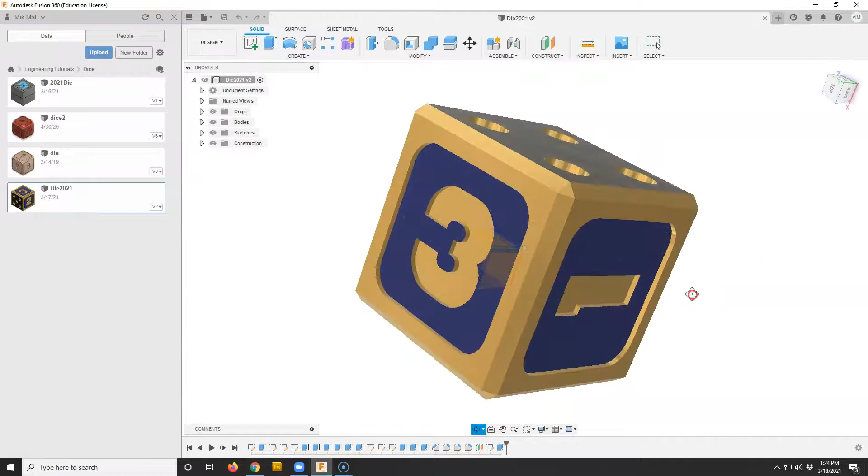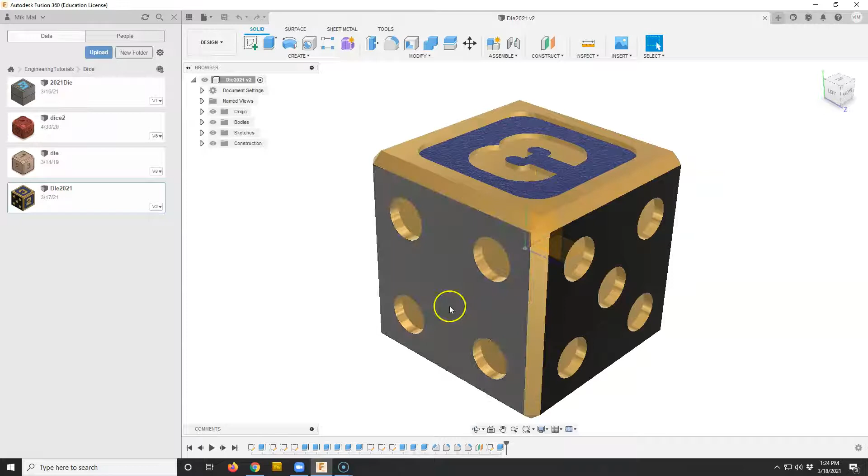If we look at this, the die we're going to make has 1, 2, and 3 in number form on 3 sides, and it has 4, 5, and 6 in dot or pip form on the other sides. It then has our edges, which I chamfer, or we can round them off to make it nice and clean. I threw some colors on it, made it gold with some extra accents on different sides, and then the letters and the pips are inset into the sides. So that's what we want to try to make.

So we're going to make a plan of attack. If we think about what's the main shape this die is made out of, it's a cube. So we want to start by making a cube that represents our die by making a sketch and then extruding it. Then we're going to place the numbers on the sides.

Place the numbers 1, 2, and 3, and then cut them into the die and maybe cut a border on those sides. We're going to place the pips using 3 different techniques on the other sides. We're going to round off our corners, or we can chamfer them. Then, at that point, we'll have a die that's usable.

Then we're going to go and actually make ours a loaded die. We're going to cut out some interior space so that our die is not perfectly balanced, that it might tend to roll a certain way. And then at the end, we can change the appearance and make it a nice, pretty color.

So I always like doing this first, whether it's on paper or in my head, kind of making a plan of attack of how I can take this 3-dimensional shape and create it in Fusion 360. So here's our plan. Let's go through and do that.

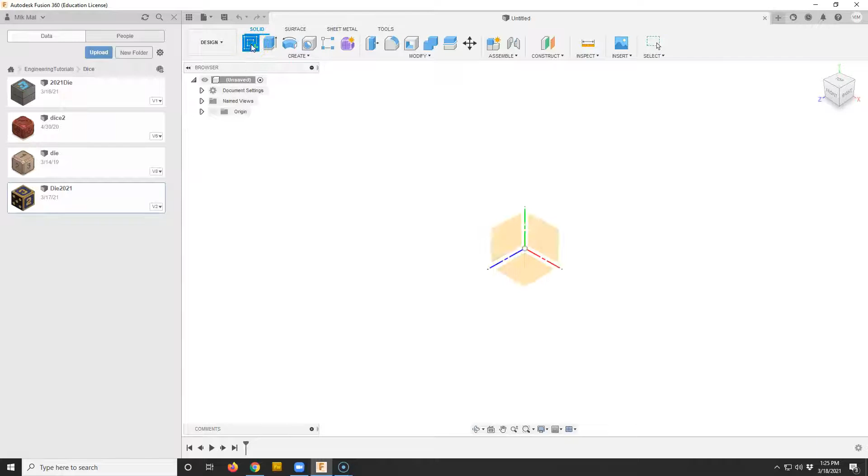Let's go back to a new one, close this off, back to an untitled one. Again, I'm going to first start by drawing my base sketch. Hit the sketch button. Again, we could pick one of our 3 main X, Y, Z planes. I'm going to pick the bottom plane here. And I'm going to use the little world view up here and click on top and rotate it so I'm looking straight down from the top.

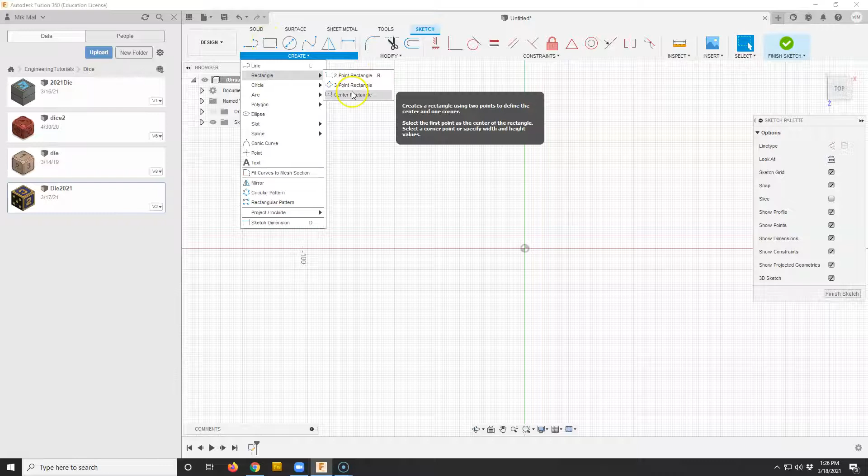Now to draw this, I'm going to first draw a square on the bottom. So I'm going to go to create. I could use this rectangle, but I want mine to be centered, so I'm going to use the center rectangle instead. Click in, and as you notice, my coordinate system showed up when I start drawing. Click in the dead center, it should snap to it when I get close. And then just drag it out.

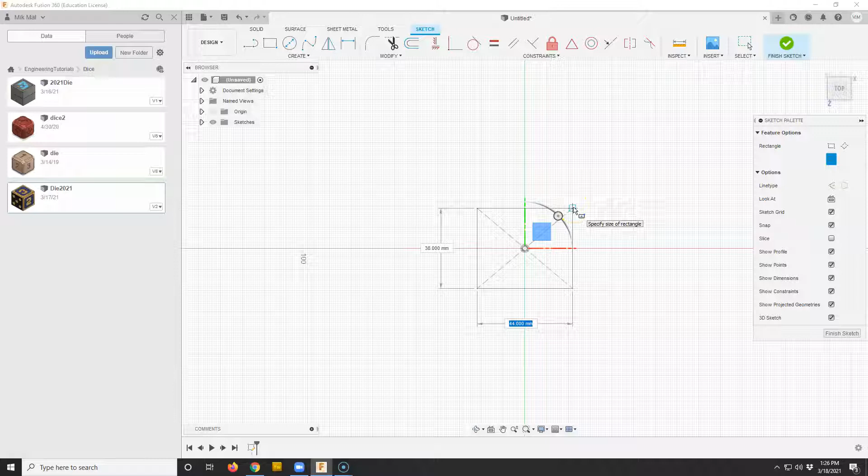Now I could just drag it and click somewhere and go back and change the dimensions, but what's nice about Fusion 360 is as you're drawing stuff, the dimensions highlighted on the bottom, and I can actually type in numbers as I'm drawing and it'll automatically shift the dimensions to be that. So I want to make my cube a 20 by 20 cube. I'm going to go 20, hit tab, that'll drop me to the other dimension, 20, and now I have a 20 by 20 square. Hit enter, finishes it off, zoom in a little bit.

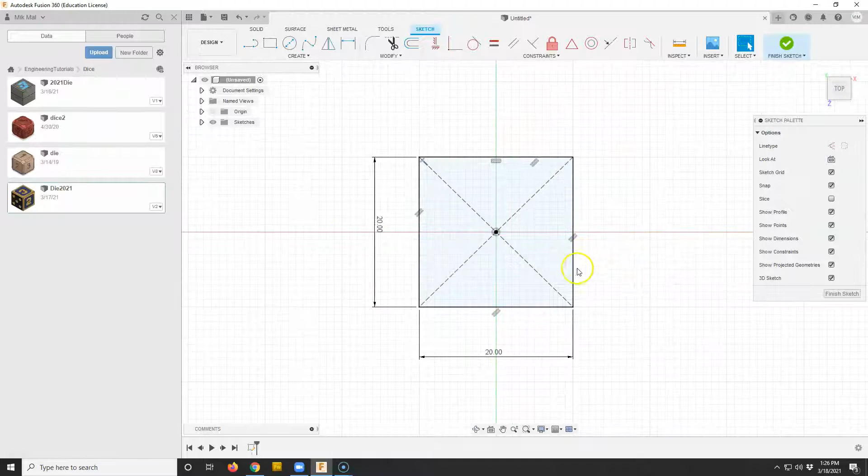Move around the dimensions if you need to, and for now that's fine for my initial sketch, just a square. Now I'm going to go back out to my world view here and click home so I can get it in that angle view. And now I want to create the 3-dimensional part of it.

So I'm going to drag this. We talked about a couple ways of making things into 3D, using extrusions and making revolutions. I'm going to use an extrusion. So I'm going to go up here and hit the extrude button.

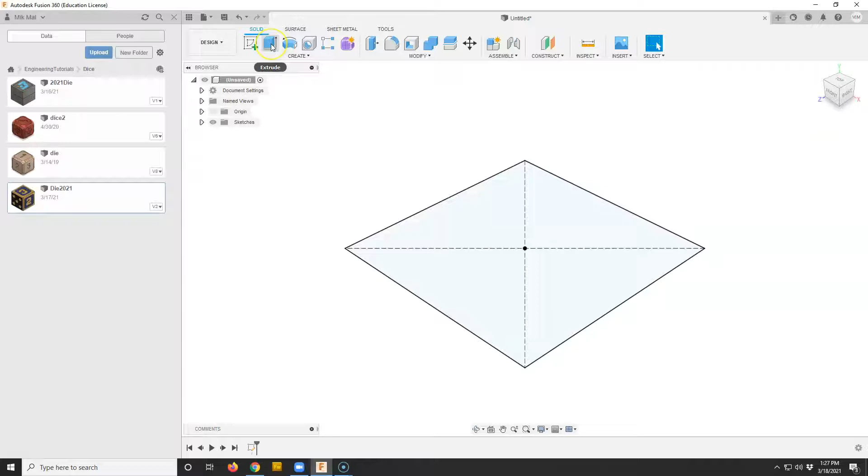And I only have one thing drawn, so it actually automatically picks it for me. If it wasn't, I'd pick what I want to extrude. And now I can extrude a bunch of different ways. So I can just grab this arrow and just drag it. And if I'm playing around and being artsy and visually changing things, I can just grab this and drag it and see what looks good.

As I'm dragging it, again, the dimension lights up, so I could type in 20 to make it a 20 unit size. Again, we're actually working in millimeters here. So that's kind of what I want to do first: I want this to be a 20 by 20 by 20 cube, so I would put in 20. Now, this seems to be fine.

The only issue is if I rotate this, my drawing plane's in the bottom, and I'm going up in one direction. I don't know where the middle of this is. It'd be nice if my drawing plane was in the middle of this cube, because then I'd have a surface dead center in the middle that I'd be able to use if I want to use it for something.

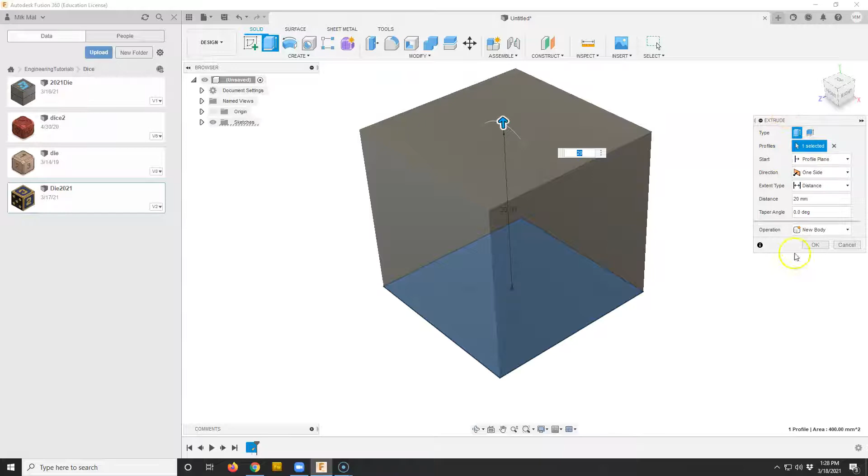So if you look at the extrude dialog box, there are a couple other options. Where it says direction, it says one side. I could select 2 sides, and that would give me 2 arrows where I could drag one way and one the other way. If I do symmetric, when I drag one, it automatically does the other one.

So I could go and drag this along, and for example, I could think, okay, I want to totally be 20. Well, if I go 10 on one side and 10 on the other side, that gives me 20. So I could design it that way. There's also another option under where it says measurement. Right now it's set to half length, so I would be typing in how far I want to extrude it in one of the directions.

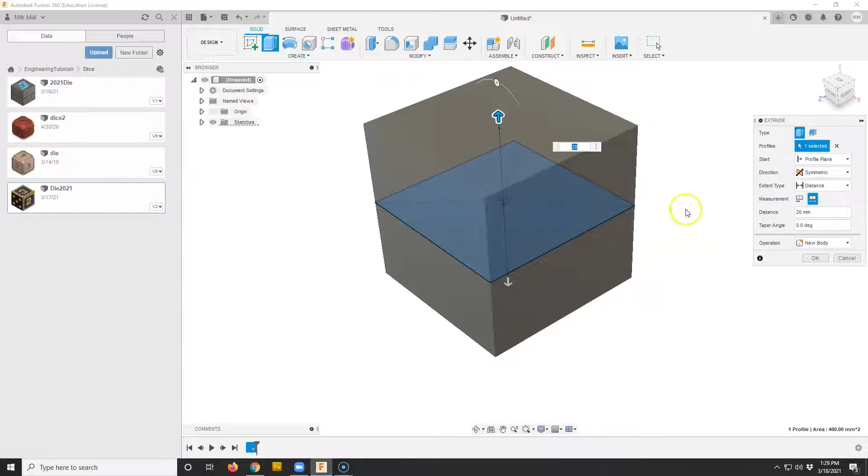But if I didn't want to do that math in my head, I could click this and click whole length. And then whatever number I type in, it's going to be the full length, and the computer does the subtraction and says, okay, this total length here is going to be 20, where it would be 10 on one side, 10 on the other side. So I'm going to use the symmetric one because it makes my life a little bit easier. And when I'm done, I just hit OK, and now I have a cube.

I'm actually going to change the display settings for a second, just so I can see the edges, so we can see a little bit better. So now I have a cube, so I'm on my way to making my shape. So that was my first step. Next step, it says, place the numbers on 3 of the sides. So this is pretty simple in Fusion. I'm just going to go to make a new sketch.

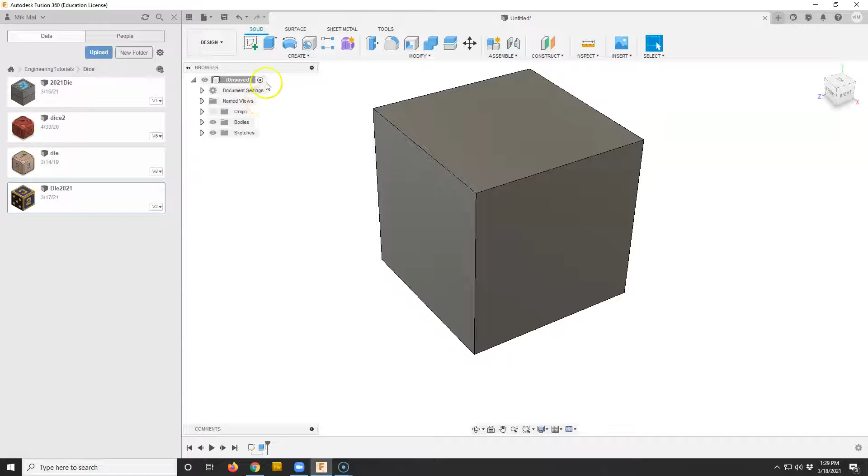Remember, whenever we make a 3D shape, usually we make a sketch, and then we do something to that sketch to turn it into 3 dimensions. Sometimes you can use the same sketch multiple times, but here I need to make a new one. So make a new sketch. I'll pick one of these sides, one of the faces. I pick the front one. I'm going to then use my world model here and spin it so I'm looking at it head on.

And I'm just going to go to create, and I'm going to pick text this time. And it's asked me, do I want to put it on a path or do I want to just draw it here? I'm just going to draw it here. And it's asked me to make a text box. I want this to be centered on my side, so I'm going to click the top corner and make my text box all the way to the bottom corner. Because that'll guarantee that I know how big the whole size is, and I could center my text based on that. So right now it just gives you some sample things.

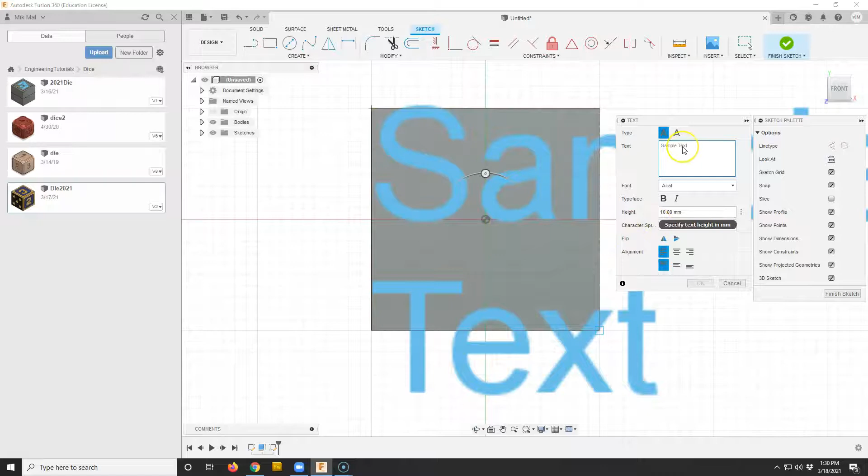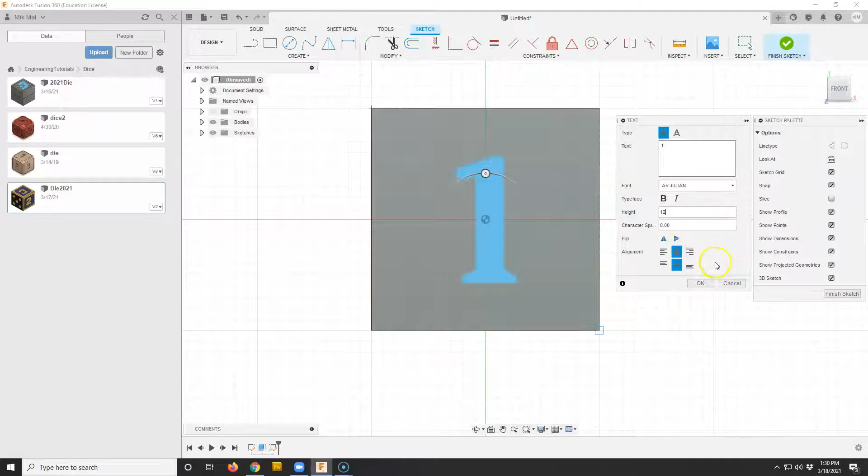So I'm going to type in 1. Right now it's left justified and top justified. I'm going to center it and center it up and down. And I have a 1 now right dead center in the middle of this face. And let's change the font to something else. Julian is fine. Let's make it a little bit bigger. 12. And I'm happy with that. Hit OK. Finish my sketch. Now I have a 1 there. So let's repeat the process, this time on our other 2 sides.

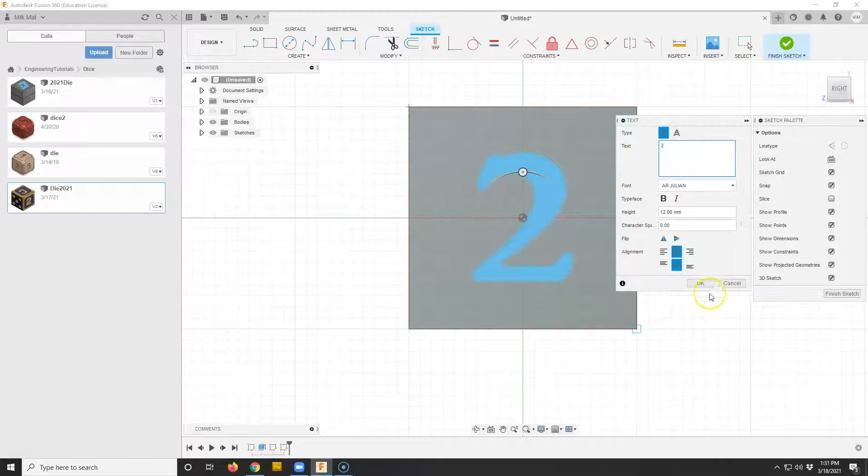And you notice it remembers what I did last, so it has everything centered still, which is nice. It has the same size as I did, so it kind of remembers that. So I don't have to go back and reset it if I want to continue with the same type of thing. And let's do 3 on the top. Now this isn't the way you're supposed to do your dice, but it's fine.

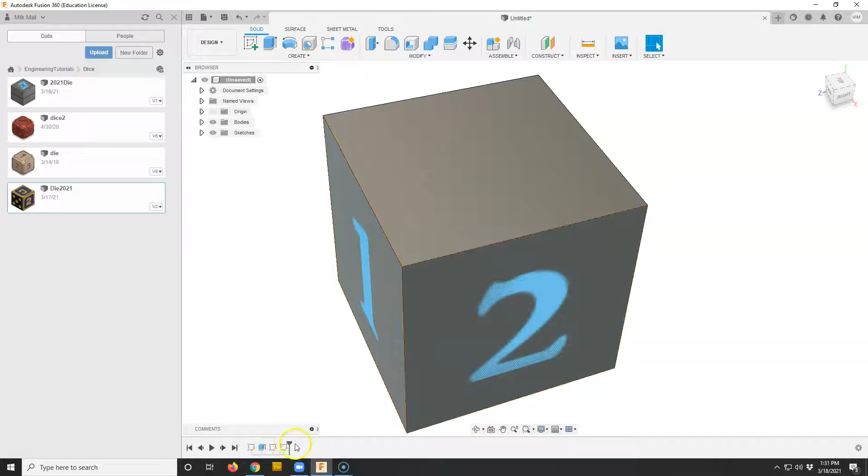I don't want to do that yet. Let's draw. Did I pick sketch already? Let's get out of here. Let's see what it is. I think I made a sketch by mistake. Let's get rid of that. Yeah, sketch on the top.

And I'm not going to move it this time because I'm doing something simple. So you can still draw on things without having them straight ahead. Sometimes this is nice because you can tell what it's going to look like at an angle. All right, I got my 3 numbers drawn.

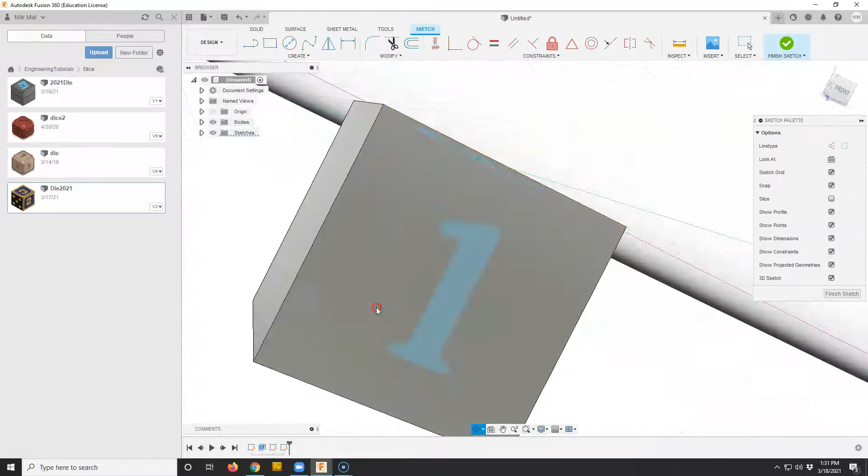Oops, where did 2 go? What happened to my 2? Oh, that's the sketch I deleted by mistake. So let's go back and draw that sketch again. Finish this sketch. I mistakenly deleted my 2 sketch, but that's all right. We can put it back there really quick.

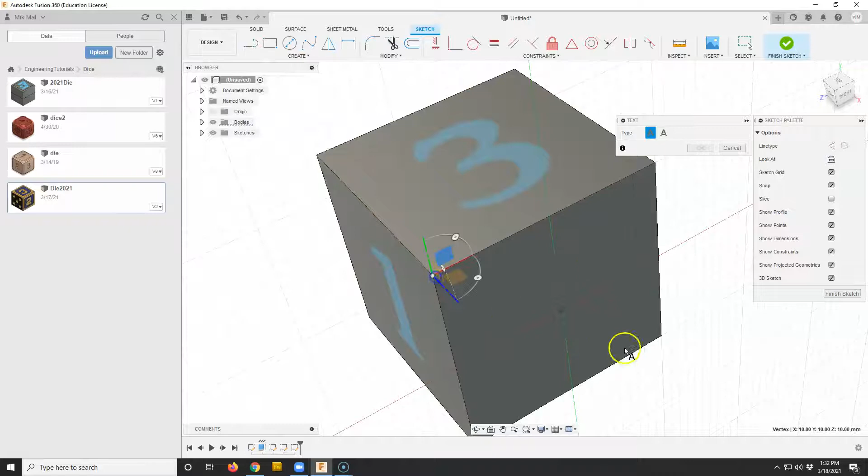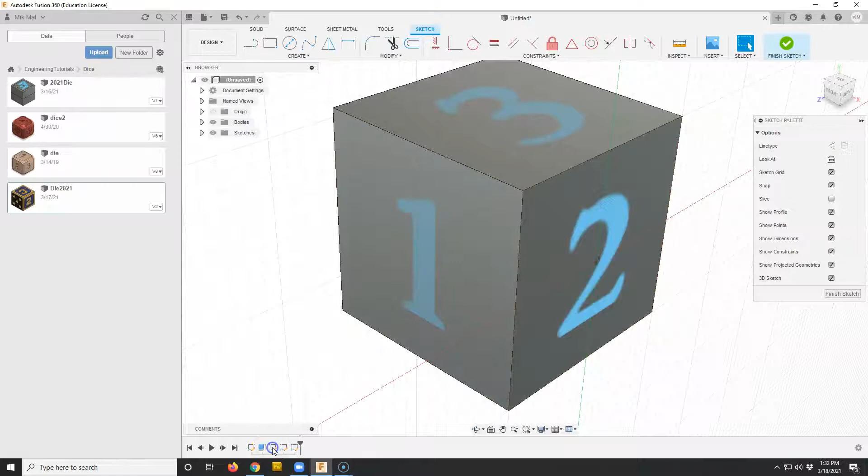And we also said on these we wanted to draw a kind of an inset. So I'm going to go back to my first sketch. Now this is the other nice thing about Fusion: if you want to go back and edit stuff, you can just go on the timeline down here in the bottom and double click on a sketch. Oh, I never finished the 3. Double click on a sketch, and it brings you back to it. You can add stuff to it.

So I can go back in here. I could change this if I want to change to a different number. I want to make that one a 3. I can go back and modify it and it updates my model. But what I want to do is add another rectangle, or in this case an actual square, that kind of comes in a little bit. So I'm going to make this one, actually let's make it 14 by 14.

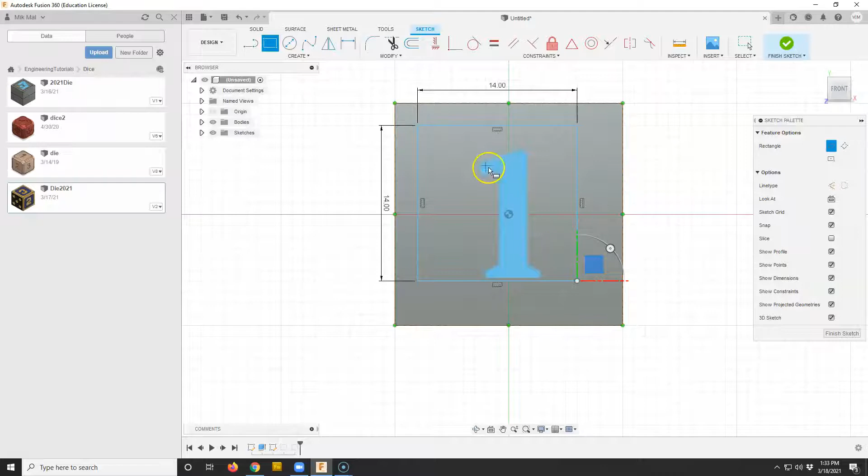And now I could just drag this around and try to center it. Here it's probably easiest to use the squares to center this, but I could also give it a dimension. So I know it's 14 by 14, but I want to tell the computer where to place it. So if my whole cube is 20 and this is 14, I want it to be 2 from each side.

So I'm going to hit the D button, click on this, and I'm creating a dimension between this edge of the new square and the edge of my cube, and I want that to be 2. And it shifts it over there. I'm going to do the same thing between the bottom and the bottom.

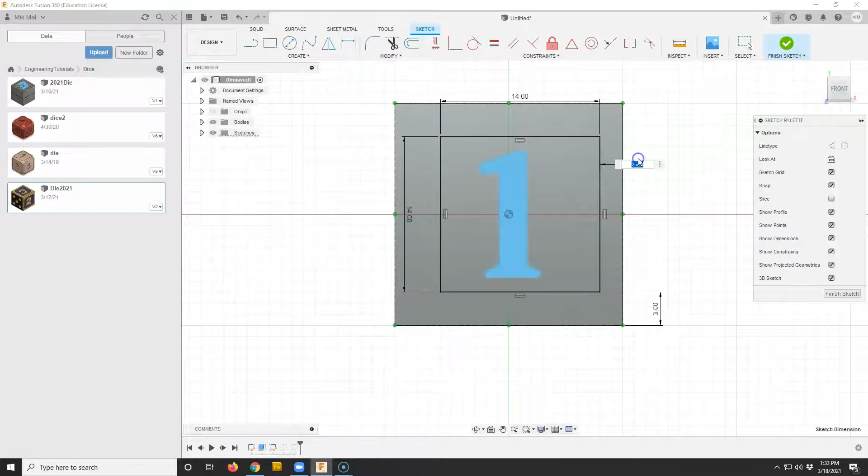And now that doesn't look like it was centered. How big did I make this thing? Oh, it should be 3, not 2. Can't do math today. 20 minus 14 is 6, divided by 2 is 3. So that places it dead center, and I can use these dimensions to control it.

There are little tricks we'll see later on of how I can make it so if I change one dimension, it automatically changes the other ones. But for now, this is good enough. This gets it centered, so I am happy with that. I will finish my sketch.

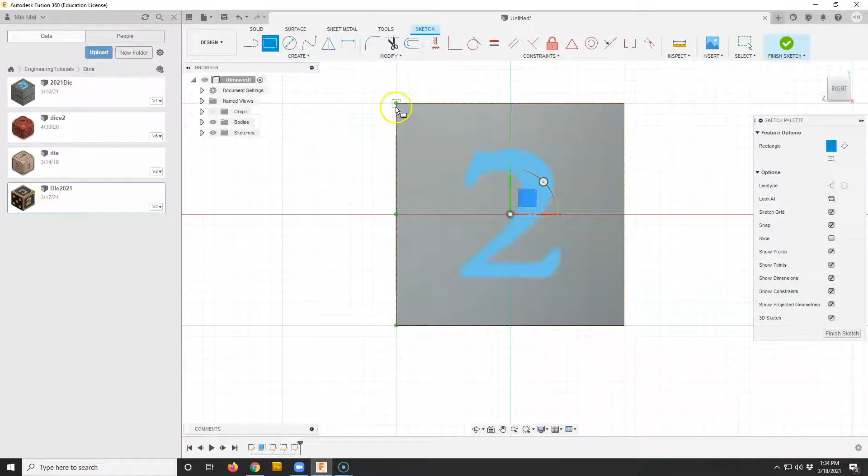I'm going to go back to the 2 and put one there. I'll do this one a little bit differently. I'm going to create my rectangle, but this time I'm going to use the grid structure that's at default here, and I'm going to go across, and it makes it a 14 by 14, and because I used the grid, it's centered. So either way, in this case, works fine. Let's go back and edit the 3. Do that one the same way.

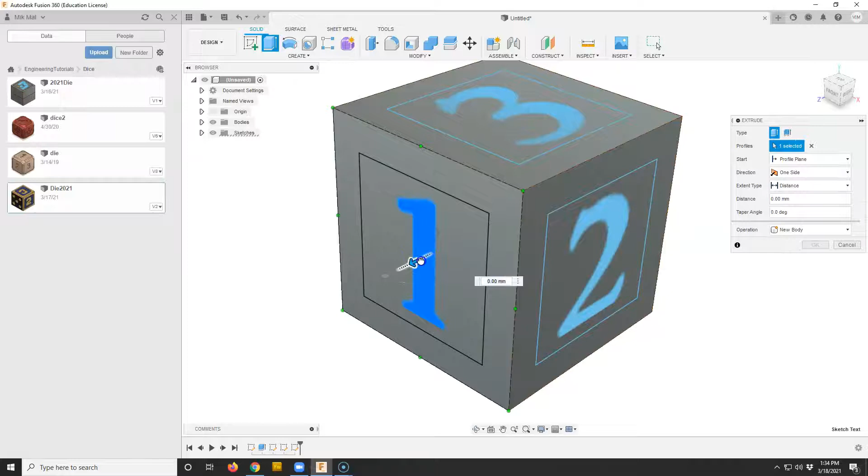So now each side has a number and it has this little kind of border around the number. All right, now we want to extrude them. And this time we're going to extrude them as cuts. So we're going to go in here. I'm going to click extrude, click the number 1, drag it in 2 units.

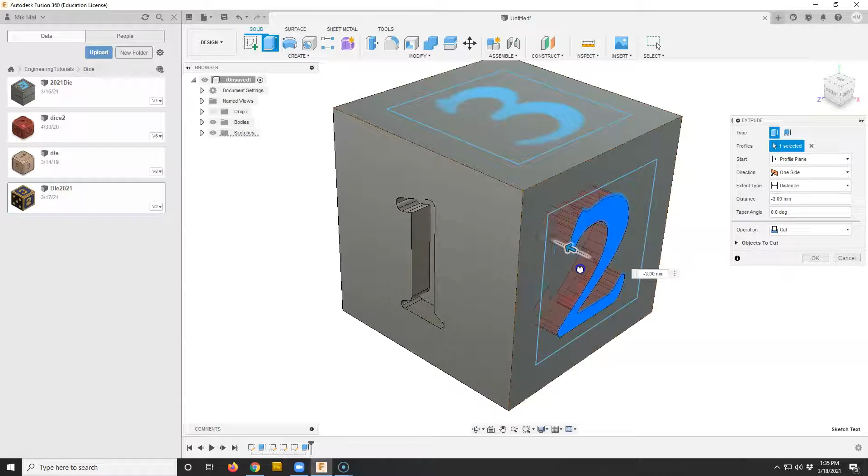And you notice this time I'll do it for the next one. When I click on the number and drag it in, you notice it turns red instead of turning blue, where if you look at the operation, it's defaulted to cut instead of where if I drag it out, it's going to default to join. So join just means it adds material, cut means it removes material. So I want it to cut, so I'll keep it cut, that's fine. And I'll hit OK. Do it once more for the 3.

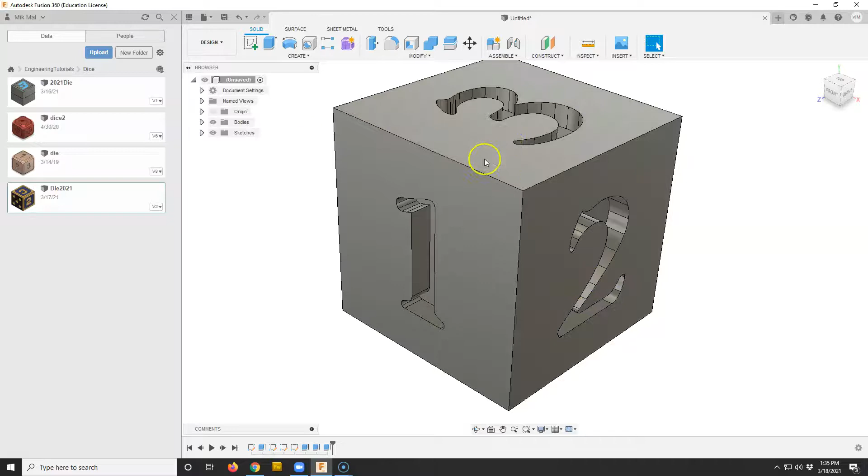And now I want to take those outlines and kind of use those and cut those in a little bit too, just to give it a little effect. But if you notice my sketch disappeared, and that happens sometimes once you use a sketch, it kind of disappears on you because the computer thinks you're done with it and it's trying to help you out. But I'm going to go back and turn them back on. I don't know why it's locked.

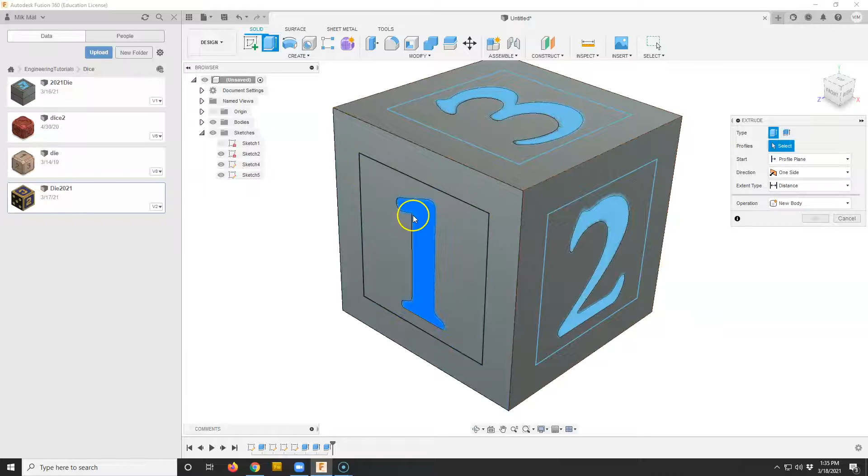So I can see them, and I'm going to do another extrusion, but this time I'm going to select the square part instead of the number part. So I'm using that same sketch, and I'm going to go in, but I'm only going to go in 1 on these. Extrude, pick the shape, drag it in, hit enter or hit OK. And now I'm going to turn my sketches back off or just hide them. And now on each side I have the number and I have this little inset border. It kind of makes it a little bit more aesthetically pleasing.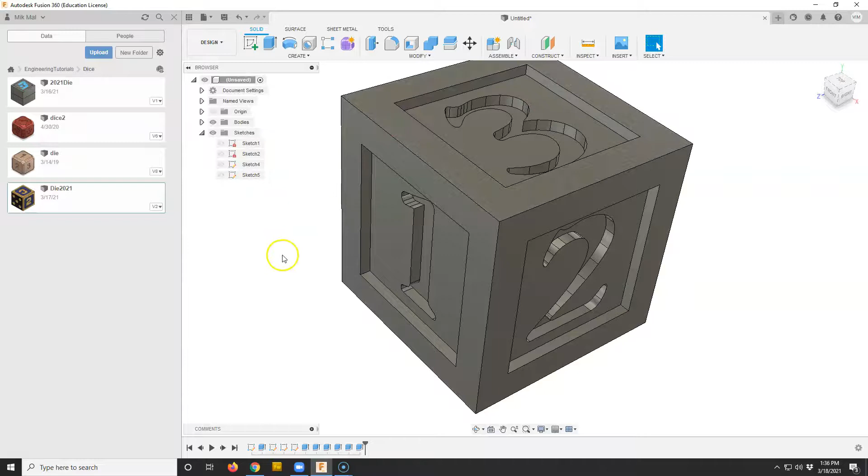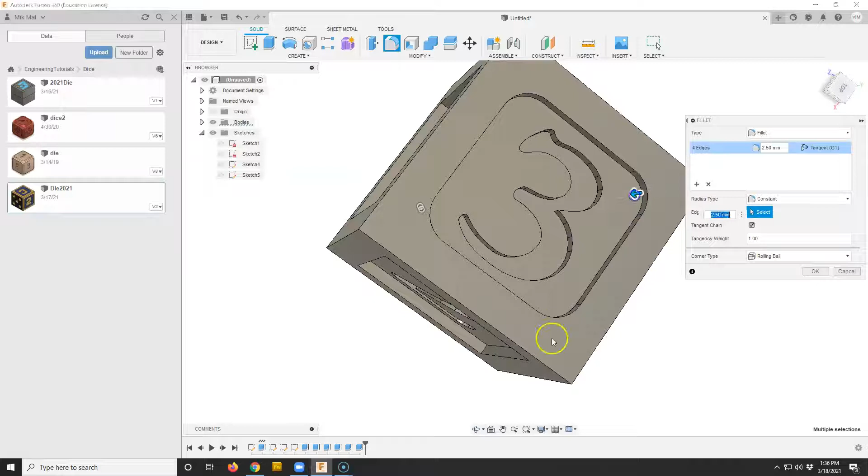So there's my numbers. I could round these if I wanted to. I'll do one of them just to show you what it looks like. I can use the fillet tool, which rounds edges with a fancy name. And I'm going to click on these corners in here. I could also have done this in my sketch. I don't want to round that surface. So I'm clicking multiple ones and they turn blue. And then I can just grab this arrow and drag it a little bit and it just kind of rounds the edges of my square. So I could do that with all of them. I'm just going to do it for the 3 right now.

Now we're going to add our pips. I'm going to show you a couple different techniques using mirroring and using drawing and using patterning. So let's do another sketch on top. I'm going to rotate it so I'm looking at the top. And here I'm going to do the 4. So I'm going to start by drawing a circle over here.

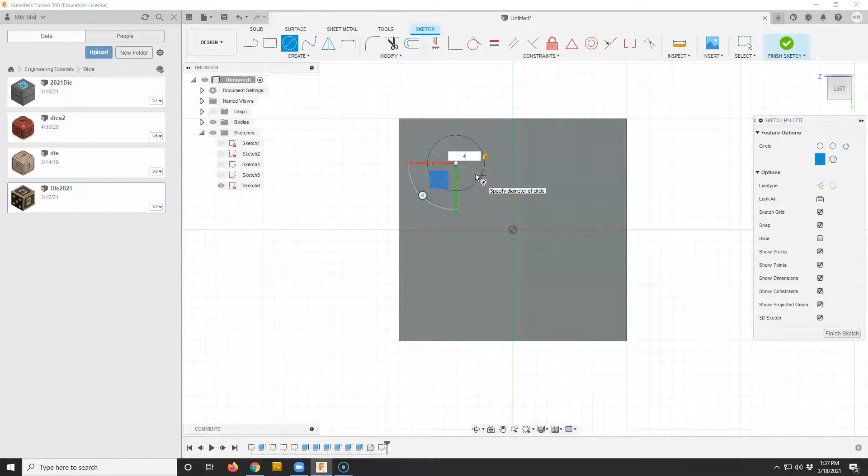I'm going to kind of just move it around and try to pick a size that looks good. So let me try 4. So 4 seems reasonable. I can maybe go 4.5 or 5. 5 is a little bit big. So I'm going to make it 4 units. And now I got to pick a place for it to be. If this is a 20 by 20, each quadrant here is going to be 10 by 10. So if I want to put it in the center of a quadrant, I can go over 5 and down 5. So I'm going to use my dimensions again.

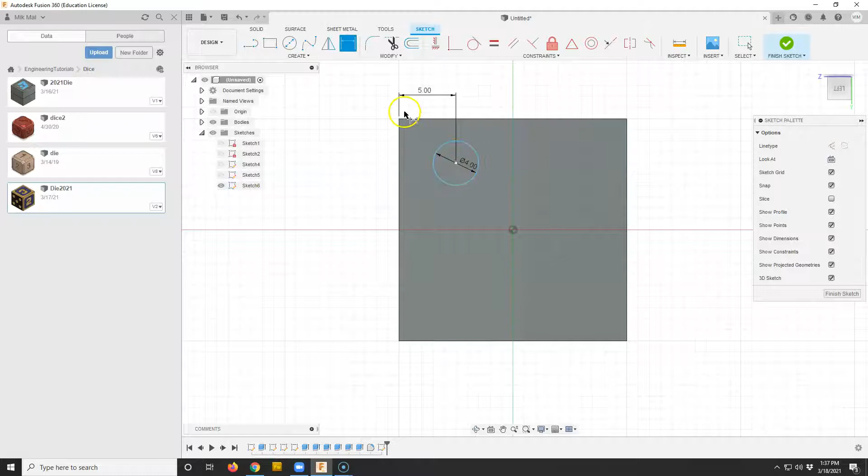You can do create, create sketch dimension, or you can just hit the letter D. And again, this time I'm going to click on the edge and click on the center of my circle. Actually, I was lucky and put it right in the middle. And type in 5, do it one more time, click D, top edge, center of my circle. Make that 5, so now I know that's dead center because this is 10 by 10. And I got one of my pips.

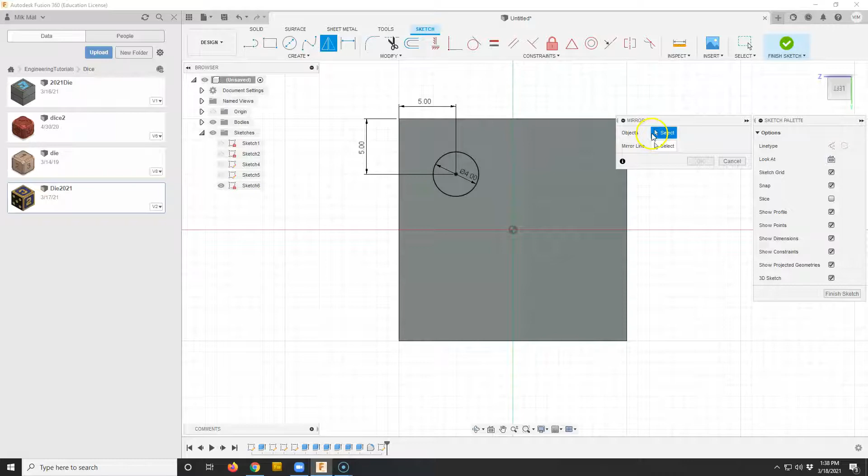Now I could draw 3 more of these, but I'm going to be a little bit lazy and I'm going to use this first one, and I'm going to mirror it to create the other ones. So I'm going to click the mirror button up here. Looks like two triangles. It's going to ask me what do I want to mirror. I'm going to select the circle. I could pick more than one thing. Then it says what's the mirror line. Right now I can't select the middle. It doesn't let me jump to anything.

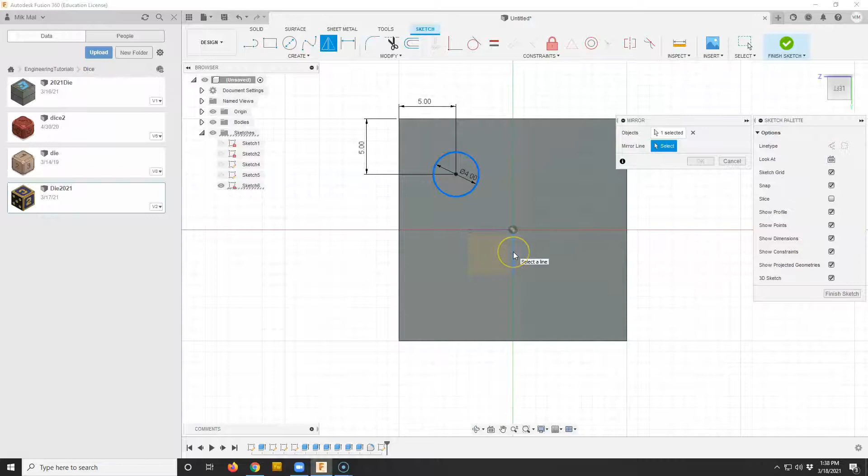But if I turn on my origin, so this button here, this is my X, Y, and Z. If I turn on my origin, I can now click on one of these origin lines. So I'll click on that one, and it makes a copy on the other side. I'll hit OK. And now I have two circles. Now I want to mirror them one more time, so I'm going to create a second mirror. This time I'm going to pick both circles, and I'm going to mirror them across the horizontal plane.

And now I have four circles, and what's really nice about this, if I go back and I want to change the size of this, all of them are going to change together because they're mirrors of each other. If I drew them individually, I'd have to change them all individually, but because they're mirrors, I change the first one, they all change to go with it. So there's my four pip side. Finish that.

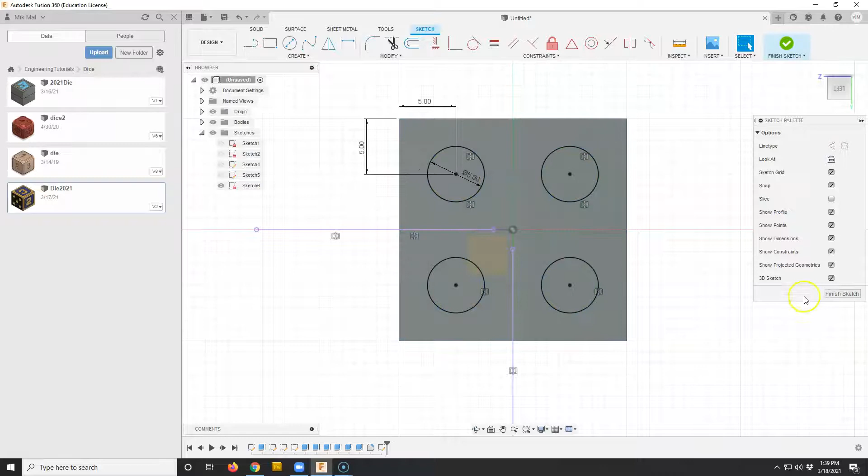Let's do a 5 pip side. So I'm going to draw a sketch on top. You might guess, hey, that's very similar to the 4 pip side, and you are right. So I'm going to start by drawing one circle. Again, if you didn't type the dimension when you draw it, that's fine. You can always go back and hit D, click on it, and give it a dimension. Let's start with it 4 this time and see what it looks like, because we've got an extra one in the middle. I'm going to give it a dimension from one side.

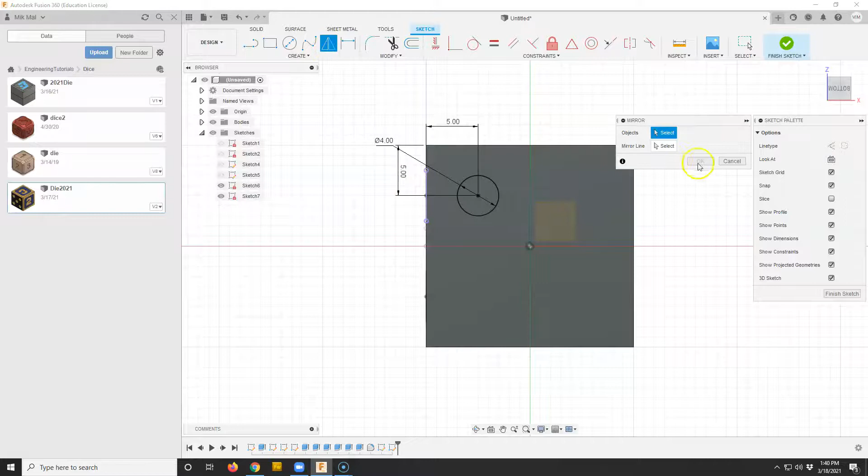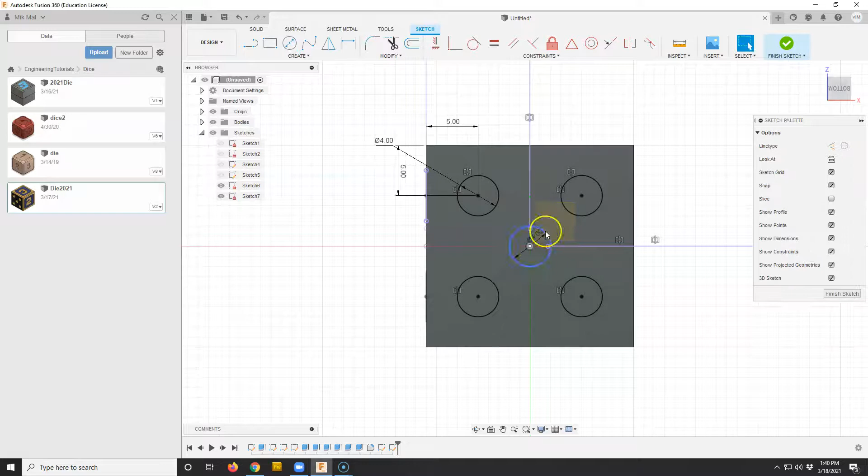Oops, I want that to be 5. Dimension from the top to there. That to be 5, so it's in the center. And now I'm going to start by doing my mirrors. So I'm going to mirror it across the middle. One more mirror of both circles across the horizontal. And now this one I have to draw, so I'm just going to draw this dead center. It's going to be the same size as the other one, so I'll make it 4. And there is my 5 pip side. Finish that. Got one left.

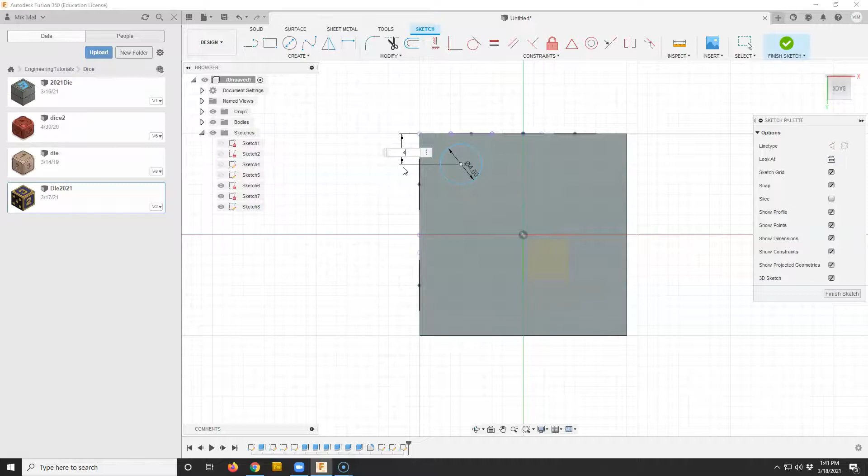We want our 6 pip side. So one more sketch over here. Now this one I'm going to start by drawing my first circle again. So I'll draw a circle over here. Let's make it 4. I'm going to dimension the first one, so I gotta think of how far from the side I want it to be. Probably our 5 is going to be too much because we're going to need 3 of these now. That wasn't right. Dimension here, center. Get rid of that and do that again. I don't know why that jumped up there. So I want dimension from this edge to the center. There we go. Let's make this 4 this time. And from this edge to the center, make that 4. And we'll start there and see how it goes.

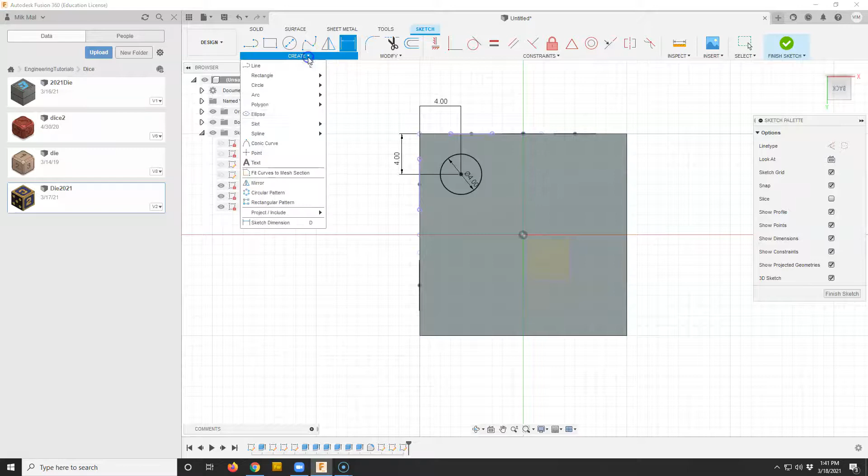So this time I'm going to make a pattern because I want to do multiple things. Now I could just draw another one in the middle, then mirror this, then mirror the whole thing. That would work perfectly fine, but I can see if I can do it in one step. So I'm going to go create rectangular pattern. Click on my circle. Now it's going to ask me how far do you want to go sideways. Now I got to do a little bit of math in my head. If I drag this, I can possibly get a guess. As I drag it, it previews to me what this is going to look like. So if I started 4 from this side, I want to end 4 from that side, that leaves 12 left. So I want to go over a distance of 12. And that should make me even.

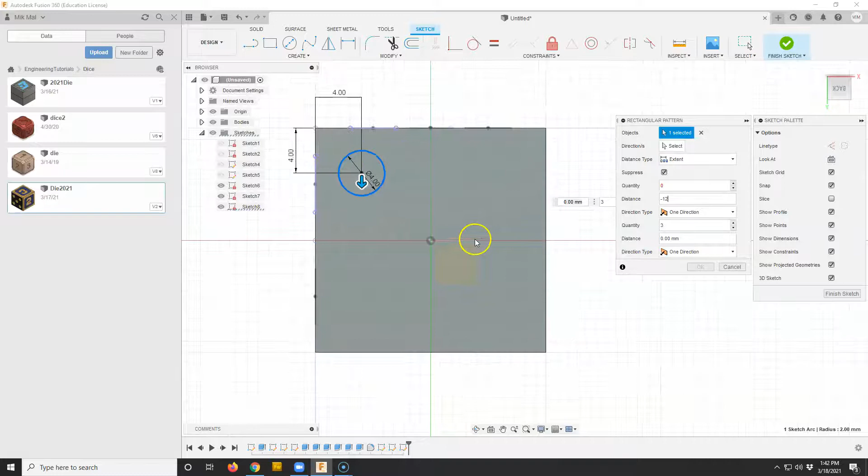So if I say negative 12, because the other side it called positive, that didn't work. Distance, negative 12. Where did it go? Let me cancel this for a second. I don't know what's going on. So I want to create a rectangular pattern of this. Negative 12 in that direction. There we go. And now it did 3 of them. I only really want 2, so I'll change that down to 2.

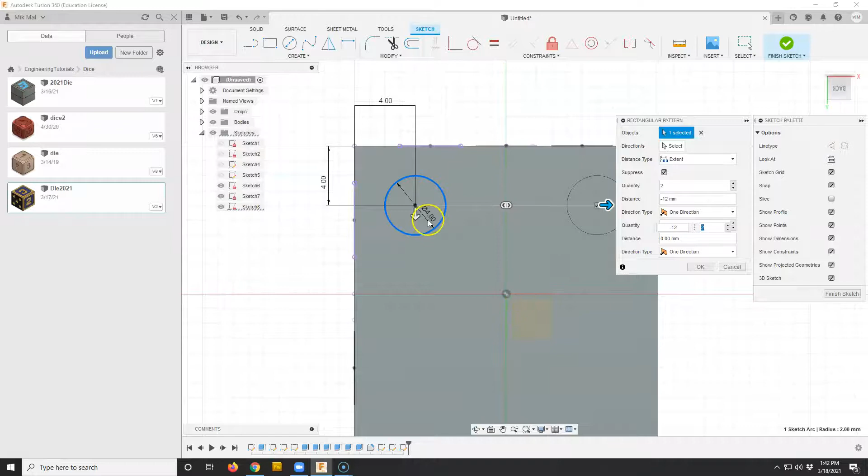And then I want to go in the other direction. In this direction, I can drag it out, and you notice it automatically copies them all. I want to do, I think, negative 12 as well, or 12 down. And this time I do want 3 of them. And when I'm done, there's my 6-sided pip. Now I might notice, okay, these are a little bit close.

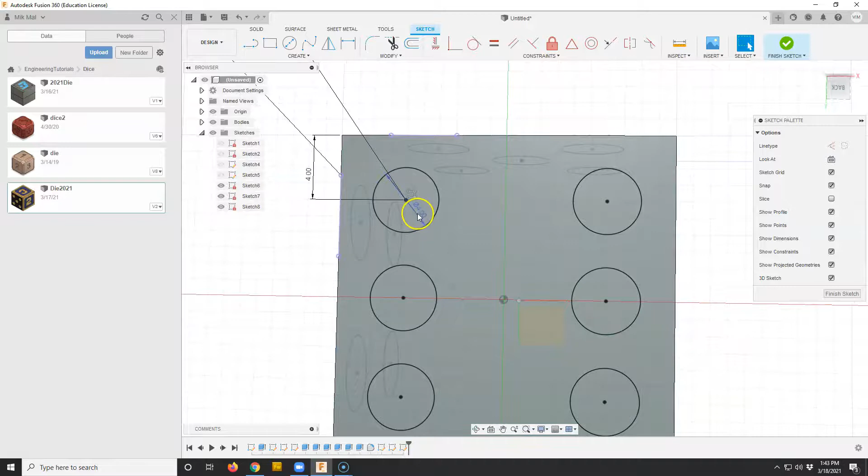Maybe I want them a little bit closer, so I can go back and edit this dimension. Look at it from the side. Maybe I want to make this 5. Well, now the only problem is I made it 5, but I got to go back and change my pattern a little bit, but that's okay.

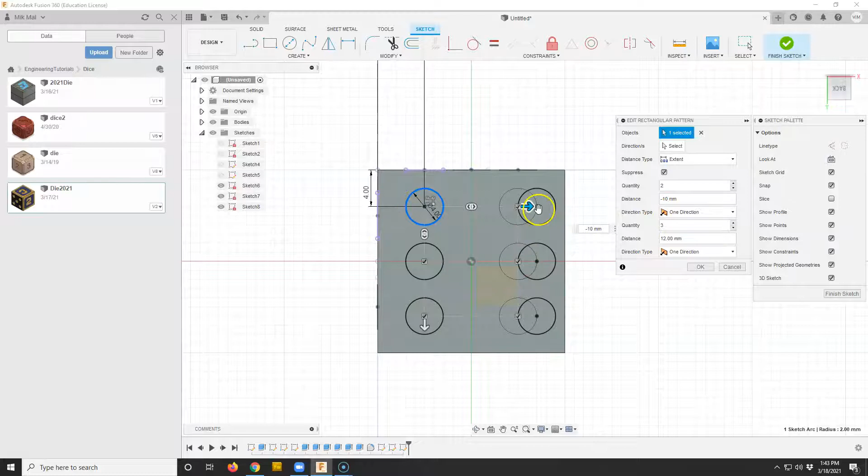So if I double click on this little square, it brings you back to that weird looking square thing. It brings you back to my pattern. So I want the distance to be 10 now. So I'll go up here. I'll reset that to 10. Because now I'm going 5 over on each side, and 5. If I minus the 5 on each side, I got 10 left. And then my pattern's updated, and I have my 6 pip side.

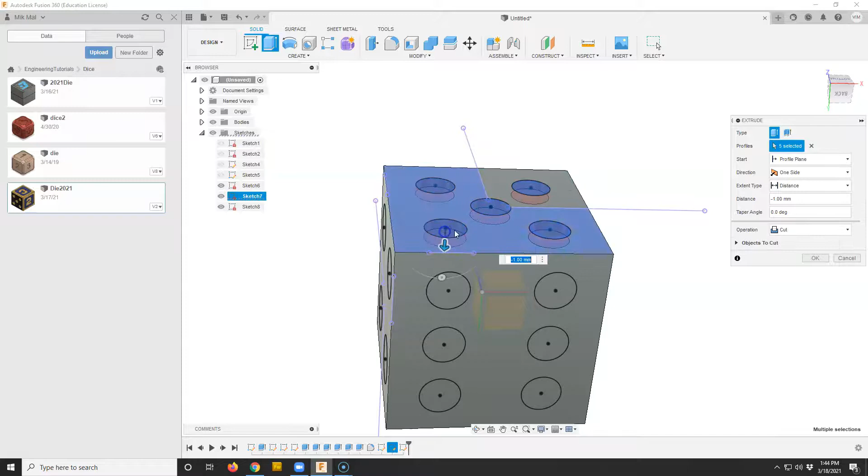All right, now I just got to do some extrusions. So again, I'm going to do an extrusion, and now I can actually pick all of these and drag them in one unit. Do this thing. And again, you could also type in, if you say -1, that negative means into the material. Or you can drag it, whichever way works for you.

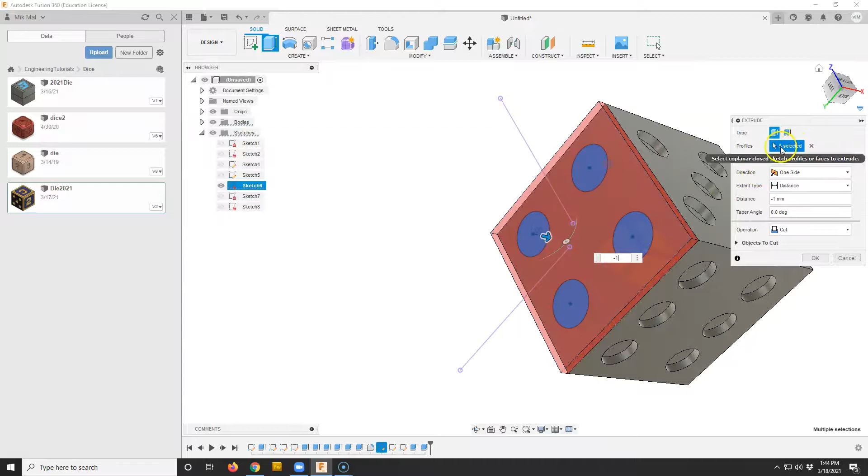Oops, what did I pick? Oh, did I pick the whole surface? Oh yeah, if you notice here, I grabbed the surface by mistake. You can see how it says 5 things selected. I can just click on it and deselect it. Now I've selected 6 things. Let's actually deselect them all. I just want the circles. There we go.

And now the main part of my dice is done. I got my numbers on my sides. I actually have a couple finishing touches. Let's go back to our list of what we wanted to create. We cut our text, we cut our borders, we cut our pips using mirroring and using drawing and using patterning. We cut them into the sides. Now we just want to round off the corners and cut out some of the middle and then make it look pretty.

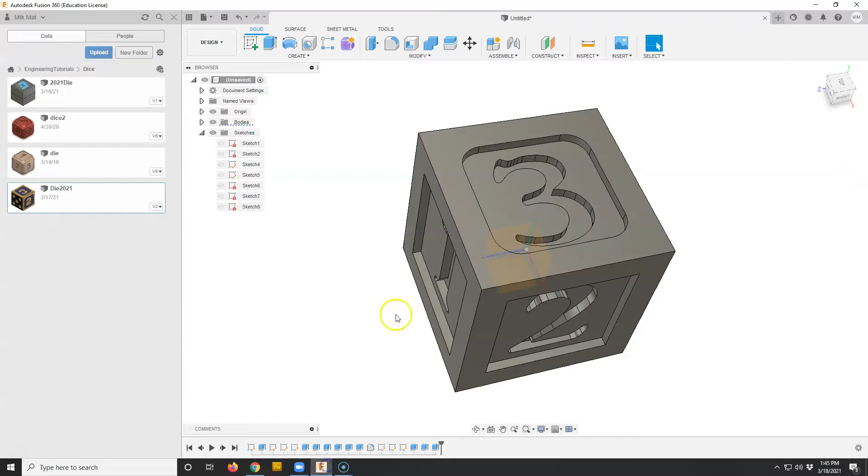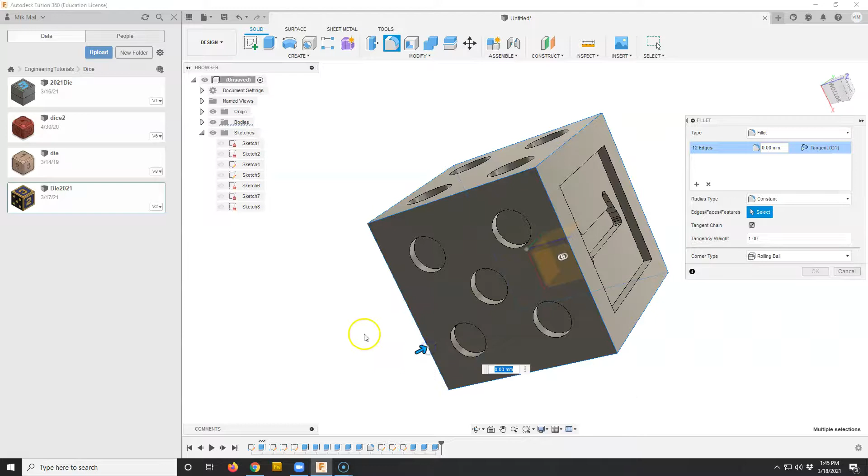So rounding the corners, pretty simple. Go up to the top under Modify, click on the Fillet, and then just click on our 12 edges. I'm just going to go around. Oops, don't want to click on it. If you click on something, you can just click on it again if it's the wrong thing. And when you do click on things, they will turn blue, so you can make sure they're the right thing. You might notice they're highlighting bold black as I'm on them, and then when I click them, they turn blue.

And now I can just grab this arrow and pull it in. I'm just going to visually do this, drag it in until I like the shape. And if you notice, I go too far, it yells at me, because if I start overlapping the things I drew, it gets freaked out and it can't do it. I get the little error messages down there yelling at me, so I just got to make sure it's a size that's outside. So I kind of like that.

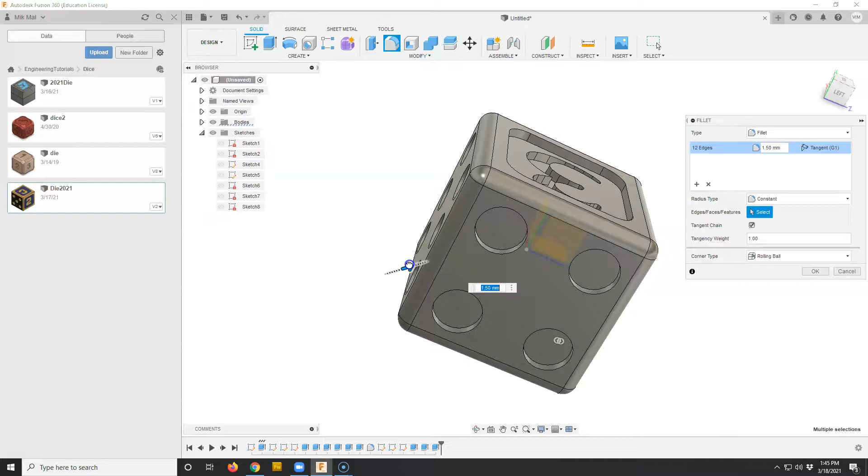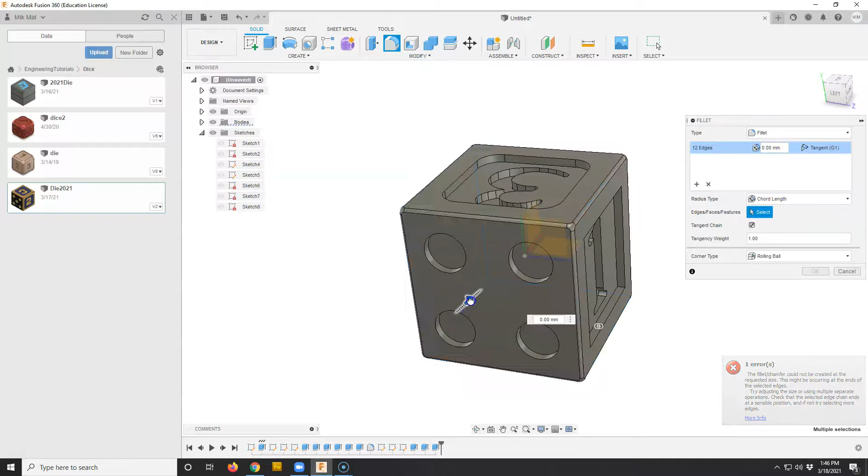That seems good. Now there's a couple other options to rounding things, where it says radius type. It says constant and chord length. That really in this case doesn't do anything different. You notice it changes the corners a little bit. That's the only real difference it makes. So again, it's a little bit different aesthetic of how the corners are created. Now it's getting freaked out. So I like the chord length version where the corners are kind of rolled on both sides like that. They're rolled a little bit farther.

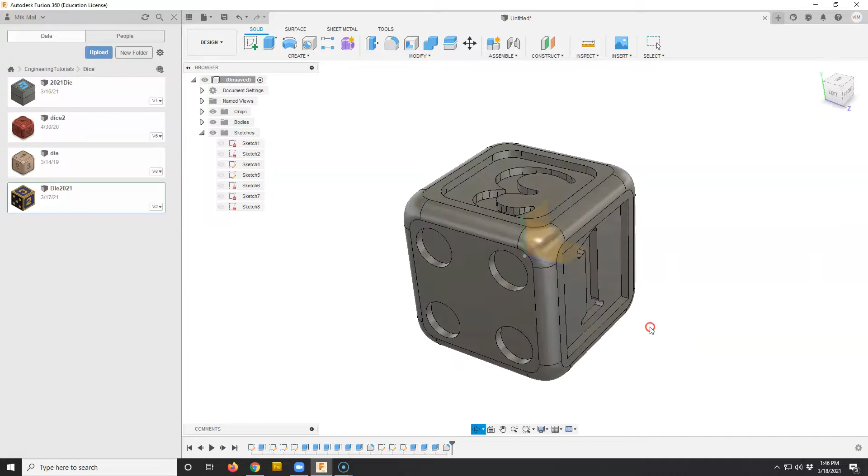You can also change rolling ball or setback. That's basically the same thing as the corner thing. So these options sometimes will do different things based on how complex your shape is. But this is good for me. Hit OK. Happy with that. I'm actually going to hide my origin so I won't have to deal with it.

Now my last step, I'm just going to make it look pretty. So I'm going to go up to Modify, Appearance. And this will bring up my appearance dialog. And Fusion has a bunch of materials saved in here. So if you want to make yours a certain thing, you can just go and find your materials.

So let's say I want to make this a metal die. I want to make it brass. It has all the settings for that type of material already built in here. So I already have polished brass. Let's say I want to make it out of, I don't know, old brass.

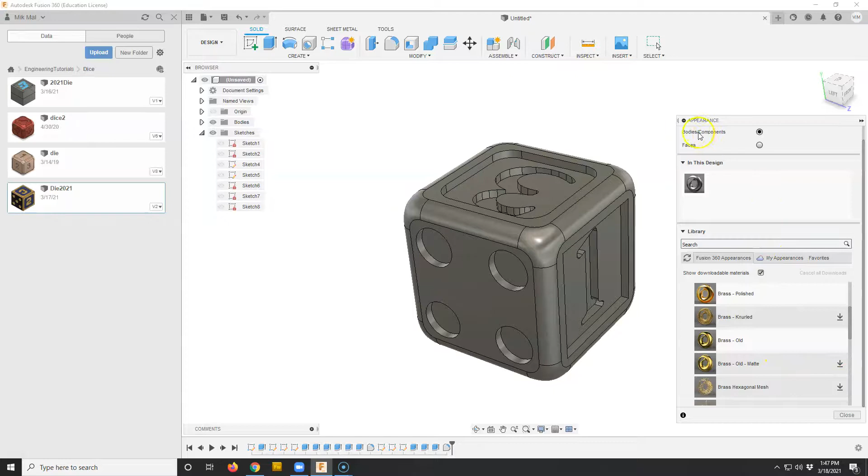If it's something you haven't used before, you have to click this little arrow and it'll download the actual texture file. It takes a second. Then if you want to use it, look up at the top where it says bodies. If I use this now, it's going to color my entire thing this color. If you do faces, it's only going to color the face that you click on.

So I'm going to do the whole body first. I'm going to make it this old brass. I just drag it on top of the body, let go, and it turns to this old kind of looking brass color, this beat up metal.

Now if I want to color some faces, let's go back. I want to add some paint to it maybe. Let's throw just some paint on it. I'll do some metal flake paint, and in, I don't know, what colors have I used? I haven't used any of them. Let's do blue. So I'll download that.

Now I'm just going to make these faces - I'll drag it. Oops, I don't want to do the whole thing. I'm going to click the face, drag it onto the face, and it's going to turn that color.

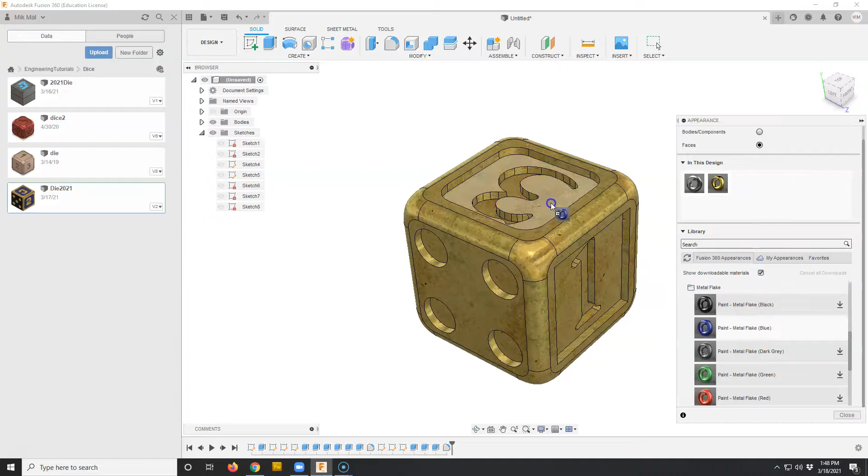So I'll make the numbers this blue color. I'll make the other faces red since we are in Somerville - why not? Just remember, the first time you use the color, you have to download it, but once you've used it, it stays there. And like that.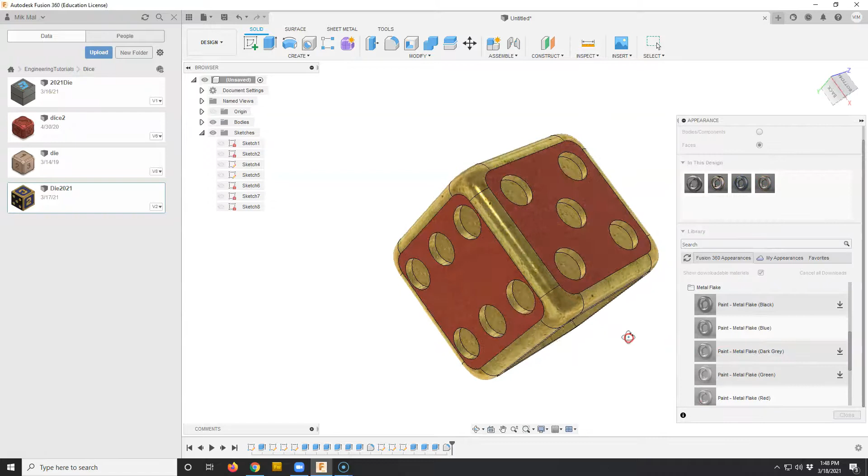Close it, and now my dice is almost done. It looks pretty. I forgot the step of making it illegal and loading it up. So now if we are making a regular die, it's done. A regular die, it's done.

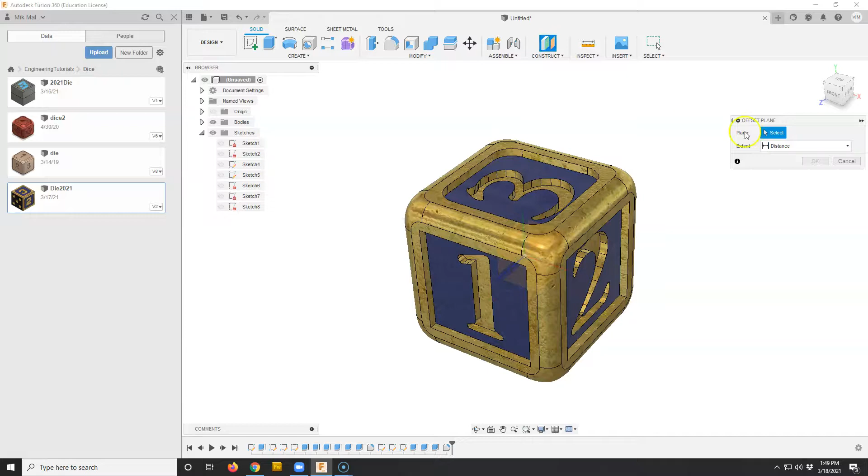Now I want to make it illegal, so I'm going to do one more trick. I'm going to add a plane - actually I do have a plane right in the middle. I want a movable plane that I can adjust to make my die roll whatever way I want. So under construction, I'm going to select a plane. It's going to tell me I'm making an offset plane, which just makes a plane parallel to some other surface.

I want this to always roll a 6, so I'm going to put 6 up. I'm going to click on that surface, and it made a plane. I can drag this plane, if I rotate, anywhere in this thing I want. So I'm going to put it, let's say, a little bit below the middle, so down there. Hit OK.

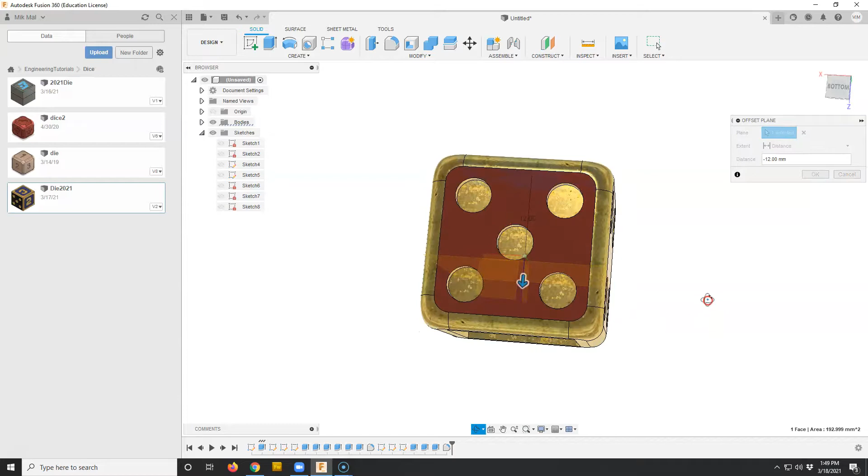Now I'm going to use that plane to draw a shape, and then remove material above that plane. So I'm going to draw a new sketch, click on that plane. To do that, I'm going to hold down the left mouse button because the plane's like inside of it, and it's not going to let me - it's going to make me select the face first.

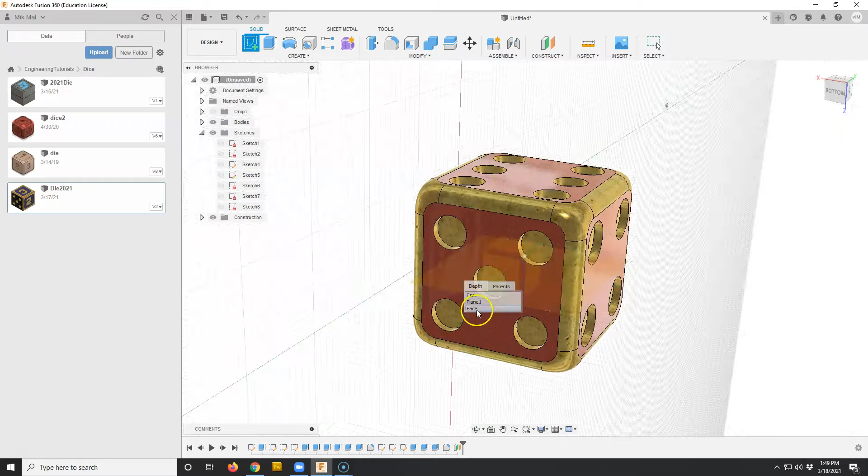If I hold down the left mouse button, it gives me the choices of different things that are on top of each other. Select that plane. I'm going to rotate it so I look down from the top, and just quickly draw a center rectangle inside here that doesn't go all the way to the edge, but goes kind of close to the edge. So, like right there is fine.

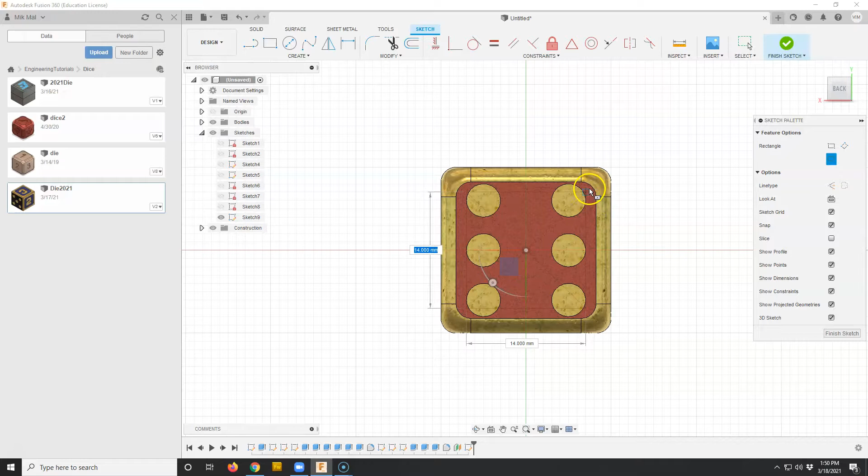Hit finish. I'm then going to extrude that. But it's still inside, if you notice, because I just made it and it was still selected - I didn't have to select it again, it auto-selected it for me. So this is actually inside.

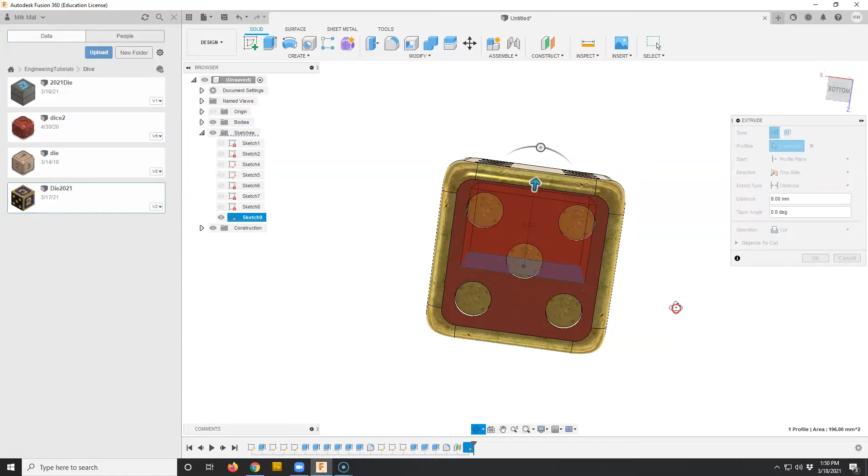So if I just drag this up a little bit, it's going to actually remove material inside of my die. What this is doing is making the top of the die lighter, so if I did roll this, it would have a tendency to have the heavy side down. So I'm doing that - it's set to cut. Hit OK. Now you can't really tell, but inside of my die, there's material missing.

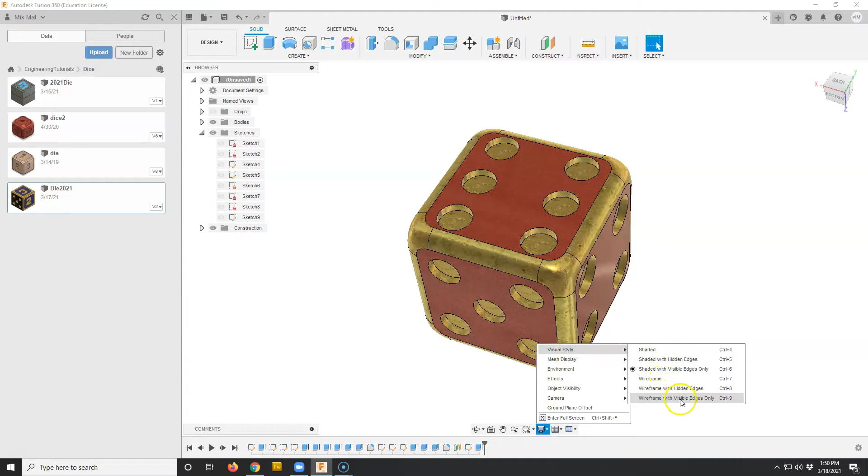If I change the view to wireframe so I can see inside of it, you can kind of see that there's a little square that's empty space inside it - it's hard to see, but it's right there. Let's go back to regular because it looks prettier, just regular shaded. And we are done - we have a nice custom design die with numbers on 3 sides and pips on the other 3.